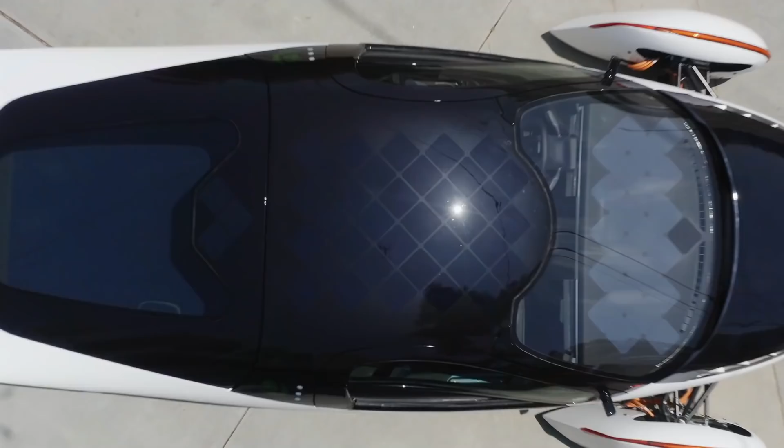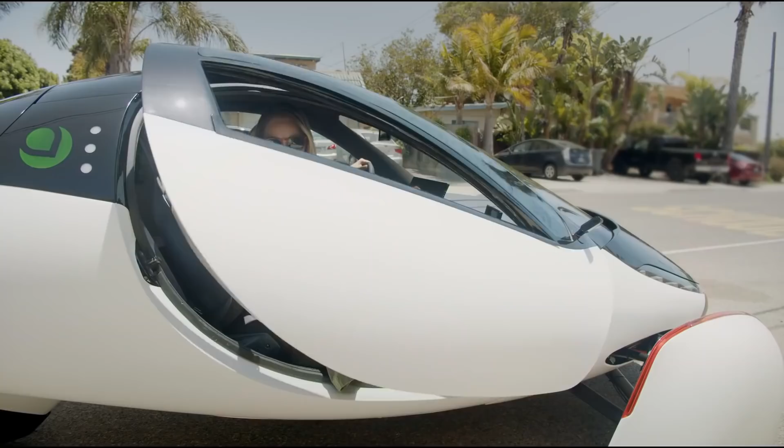Sarah, Steve, Chris, and Jason go over some of the features and improvements made to the vehicle, the latest Aptera Sol. Steve speaks about how working with Elaphe has enhanced motor efficiency and packaging.

Chris and Steve explain how the team at Aptera has been using AI-generated design iterations, which have led to redesigns that increased the amount of interior cabin space as well as battery space.

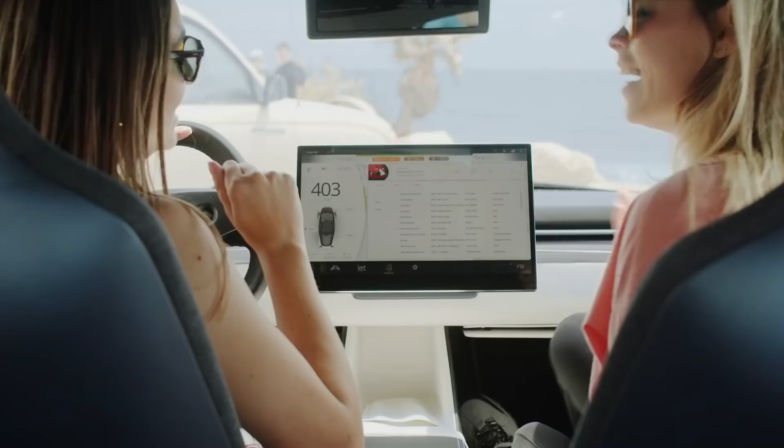Chris explains that they have redesigned how the vehicle structure comes together to ease assembly and ensure better tolerances. We know Aptera is working with Munro & Associates, and Sandy Munro loves a well-put-together vehicle, so these changes should improve the fit and finish, the detailed look of the vehicle.

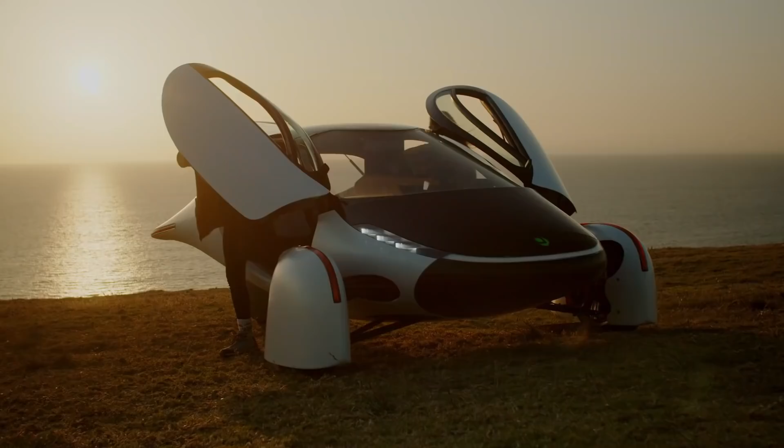A big improvement is that Aptera is working with Roush to improve the suspension system, vehicle stability, and achieve a tighter turning radius. For those who don't know, Roush is a premier company known for producing high-performance components for street cars and race cars, so seeing them partner with Aptera is an exciting development.

In addition to those things, Steve and Chris go over improvements in composites, solar and battery systems, and a lot of other things. I'm not going to keep this going long, so let's get to the video.

Hello everyone, and welcome to our beta update webinar. I'm joined today by Chris Anthony and Steve Fambro, our co-founders of Aptera Motors, as well as Jason Hill, Aptera's designer. And I'm Sarah Hardwick, our Chief Marketing Officer.

Today we'll be discussing some of the updates and enhancements that we've made to Aptera during our beta development phase, which has happened over the past 18 months. We have a lot of new information that we'll be sharing that's never before been seen or discussed, and we'll also be taking quite a few questions from our fans over the course of the next hour. So we hope you enjoy what we have in store for you.

We're going to dive right in today, and talk a little bit about what you'll be seeing. Over the next hour, we have quite a few new features that we're going to talk about in detail.

We're going to talk about how we've added some additional interior and battery packaging room through our AI generative aero improvements, and Chris will be talking about that. We'll also be talking about how, with Elaphe, we have enhanced our motor efficiency and packaging.

We've also come up with a brand new body part breakup, which will be assisting us to ease assembly and assure better tolerances. And a very new and exciting announcement we'll be having on our website later today.

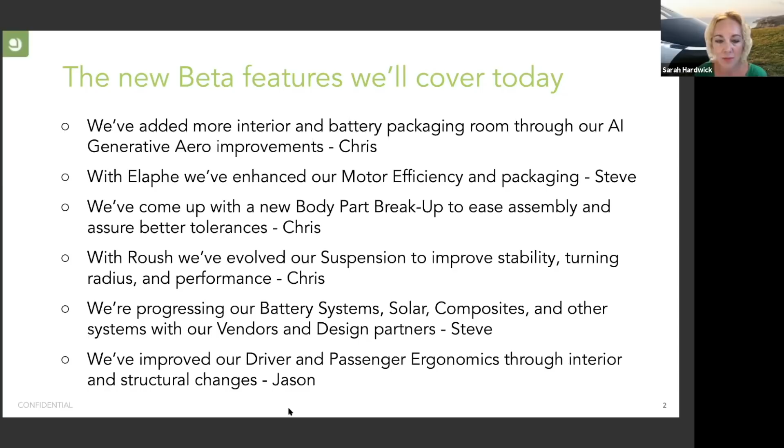Just to give you a little bit of background, we had honestly hundreds and hundreds of questions submitted from our fans and through social media. Probably the biggest one is, where are you guys at in production, and when can we expect to see our Aptera vehicles parked in our driveway? So we thought it would be helpful to reinforce and give you some background on the stages of vehicle development that we have here at Aptera.

So the first stage, which we've just completed, is our alpha phase. Our alpha vehicles are really our learning tools. You've seen Noir, and recently, hopefully everyone's headed over to YouTube and checked out our new video on Sol. The newest addition to our alpha series of vehicles is Luna, and Luna just arrived here in San Diego last week.

So we'll be talking about the progression we've made over the past 18 months from our alpha phase into beta. What you'll see in beta is much more production intent. This is actually going to be what we're representing as our product. When you look at alpha and beta visually, you might not see huge dramatic differences, but actually they are very significant, and that's what we'll be talking about today, some of those improvements and where we're at as we've moved through completion of a lot of the beta phase.

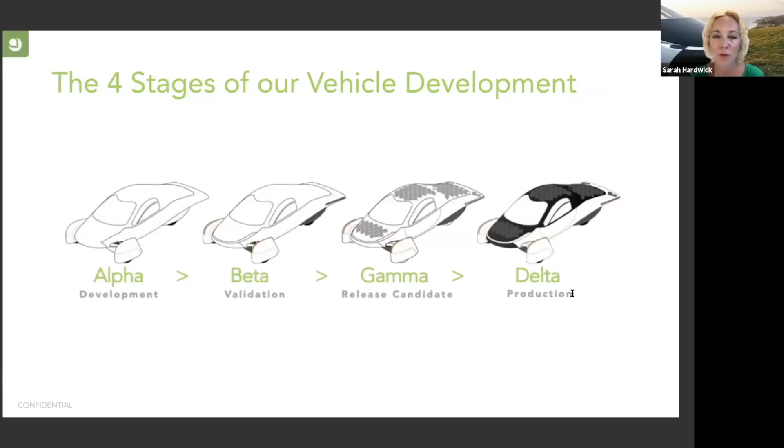From a timing standpoint, we are still aiming and hoping to have moved through gamma and be into Delta by the end of the year. And of course, there's a lot of positive things that could speed that up, or there's also some challenges. So we will keep you posted. We are dedicated to being very transparent with you and letting you know exactly where we're at in this process. But as of right now, we're optimistic and pushing forward very aggressively to achieve those goals that we've set forth.

So with that, I'm going to turn it over to Chris Anthony to talk a little bit more about aerodynamics and what we're seeing with some of our aerodynamic changes that we'll have during our vehicle phases here.

Hey everyone, excited to be here to talk to you about our beta developments over the last 18 months. It's been a whirlwind of activity, hiring up here in our shop in San Diego, finishing up some of our alpha builds. Hopefully all of you have seen the video of Sol, which we released yesterday, which is just so beautiful, driving along the coast and being able to finally see some of the camping features and a little more in the interior. It was a blast to just hang out with everyone and get some great video segments on Sol.

Luna is coming. You actually see it in the background here. The gray vehicle, we haven't wrapped it yet, so it doesn't have any color on it. We're working on electrical and interior fitment and that kind of stuff now. So hopefully in the coming weeks, that vehicle will come together, and that will cap our alpha development.

And then we'll be firmly in beta land, which is releasing tools and parts for beta to build beta throughout the summer. The intention is to get as many production parts into beta as possible, and then learn from that development, and then launch into the gamma and delta versions, hopefully by the end of this year. Super aggressive timelines. All of our engineering partners are feeling the intensity of our efforts.

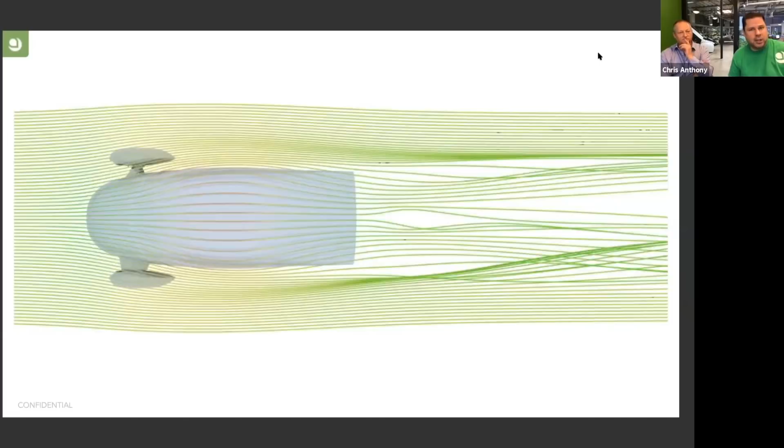Jason informed us that we'd like some more interior room, better ergonomics for the driver and passenger, which required us to change the shape a little bit. We pushed some headroom out, which has implications on our aero, so we actually grew our frontal area by 1%. But we decreased the overall drag product of the Aptera, which is an amazing feat — to actually be bigger, but reduce the overall energy it takes to push the air around the vehicle.

It's amazing that we're able to really zero in on these tools we didn't have a decade ago, but are available today. In a matter of hours we can run a simulation and optimize a certain point. You can see on the slide exactly how the air flows around our very beautiful body structure, in combination with Jason and the team. We've worked to keep it beautiful, but optimize in every direction we can.

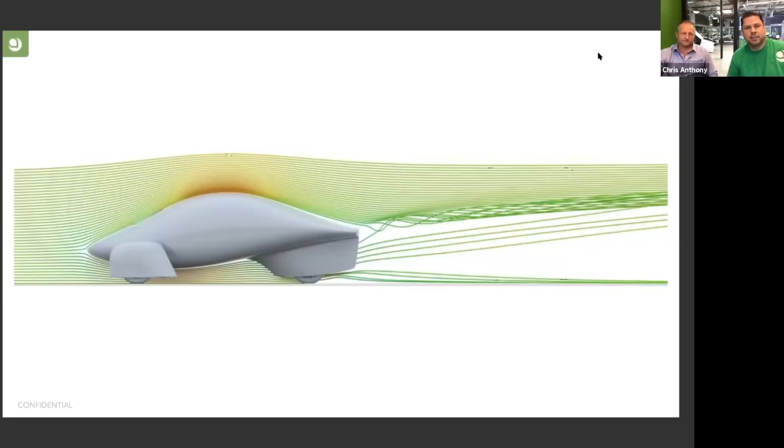The next slide is another view of the flow lines around the vehicle. You can see the foil going through the air — you get high pressure above and below, and we try to keep the air hugging the vehicle as much as possible through every inch that it covers on land.

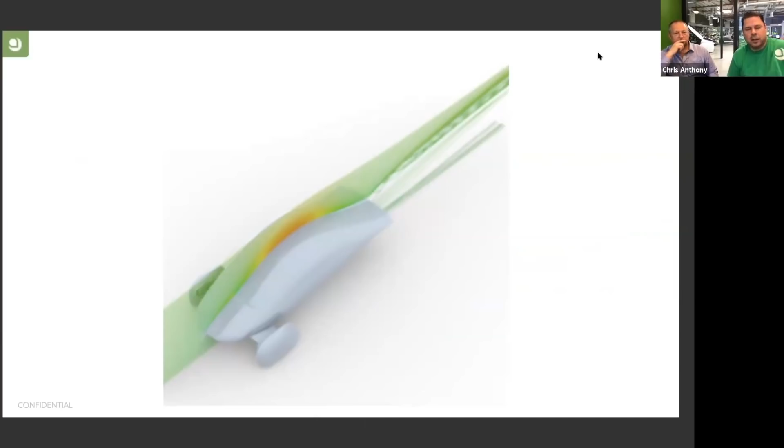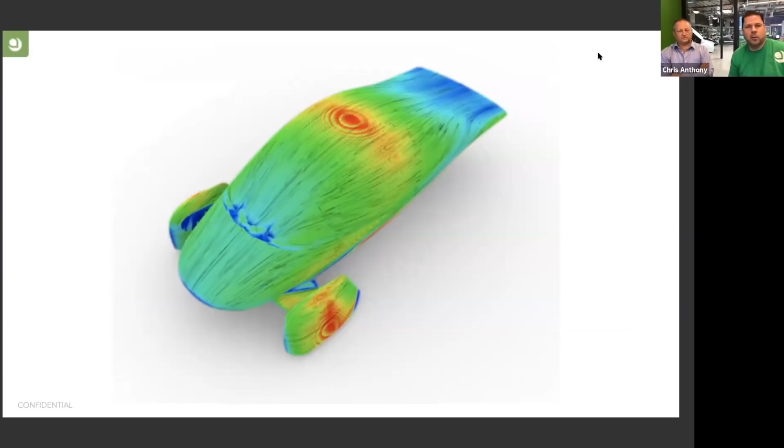The next slide is a pressure map that shows it a little better maybe. You can see the nose and the front of the wheel pants take the brunt of all our aerodynamic hits. If you looked at this kind of analysis of an F-150 pickup truck, the side view mirrors would be big and red — and the total aerodynamic drag of the whole Aptera is less than just the side view mirrors of an F-150.

So it's pretty amazing that this whole vehicle, which seats two passengers side by side, is as wide as a Model S and as long as a Prius, yet it's like driving down the freeway in any car and just sticking two of your hands out of the window. That pressure you'd feel at highway speeds against your hands — that's what the total drag product of the Aptera feels like. It's amazing how little energy we have to use to push the air out of the way.

And it's for a big shape too. You can camp in it, you can put stuff in it, you can sleep in it. So you're bringing this big shape along with you — you're not in some tiny little car, you're in a pretty big vehicle.

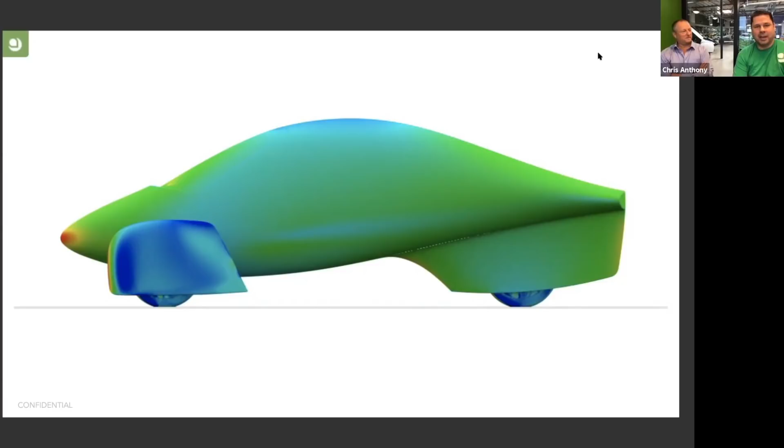The improvements we've made on the ergonomics and everything will suit almost everyone except maybe Shaquille O'Neal — we may have to make a special seat for him. But there's lots of interior room, and to get that kind of packaging and still keep the drag product we have is amazing.

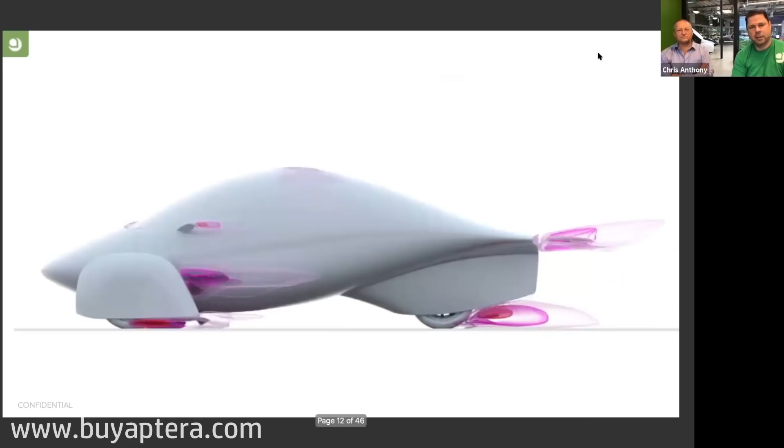On the next slides we get into some noise analysis. An interesting thing in our analysis is looking at noise — it's often indicative of where things get dirty. You'll notice we've added side view mirrors in this analysis, since we have regulatory requirements that require us to have mirrors. We'd love to not have mirrors because, as you see, that adds to our total drag product, but we're talking about some asymmetries and ways to streamline that. That analysis is ongoing.

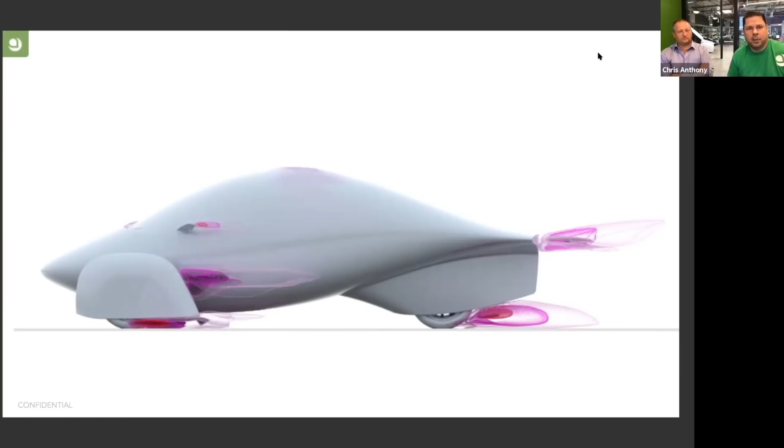The areas of improvement still to be had, I think, are really in the wheel pants and the suspension. Steve will talk more about some of the refinements we've made with the alpha in the coming slides, but really the front wheel covers and the suspension in between those wheels are areas of interest for the next month or so as we start to wrap up our beta design and release all that tooling.

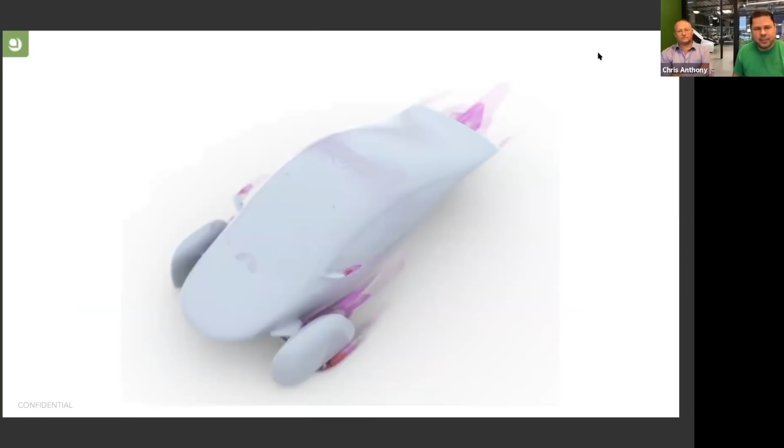You see that area between the front wheel cover and the body. Air gets smushed between the front wheel pant and the body, and that's one of the biggest areas of drag for our vehicle. If we got rid of those front wheels and had some propulsion system that just allowed us to float, we'd have amazing aerodynamics. But unfortunately, you have to have rubber on the road. So that'll be our next focus.

Everything's coming along great with beta development, so we wanted to talk with you a bit about this. This is a good picture showing you how that air is funneled between the body - it looks just like a big funnel between the body and that wheel pant. So things get ugly behind the suspension and the back of the wheel pant. We're working hard to improve that.

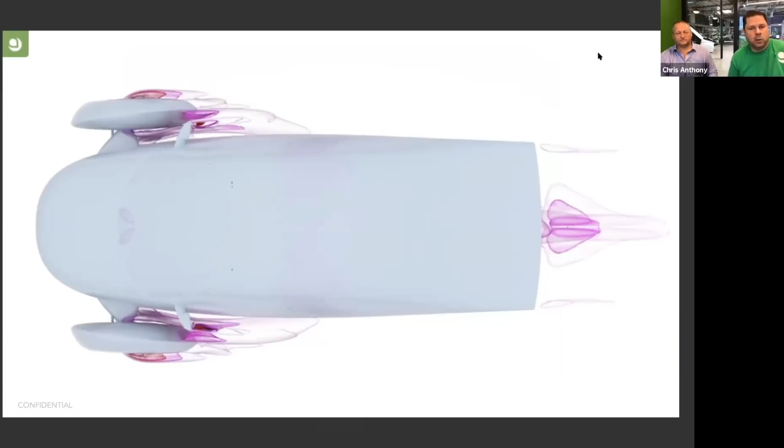Even though things look ugly, we're still at a drag coefficient of 0.13. So for us, it's ugly - we want to improve upon that because we see opportunities, but comparatively speaking, we are beautiful. We definitely want to see improvements there.

This GIF is an interesting analysis. I don't know if it's actually playing though. I don't see it moving here. I don't think it's moving. Sorry, Chris, doesn't look like it is here, but...

This boundary layer, the layer that you have in red there, is actually a way for us in fluid dynamics to let the computer do the work of optimization. When we put this model in the computer, we can let the AI generative design take a look at a boundary layer, and it'll say, this is what you should do to make this more aerodynamic.

A lot of things that we've done over the last years have been very counterintuitive. I'm a fluid dynamics guy from hydrodynamics, and Steve's a pilot for the aerodynamic side, and things that we kind of intuitively say we should do, we do, and then we put it in the computer, and the computer says no, that was bad. And then we start over.

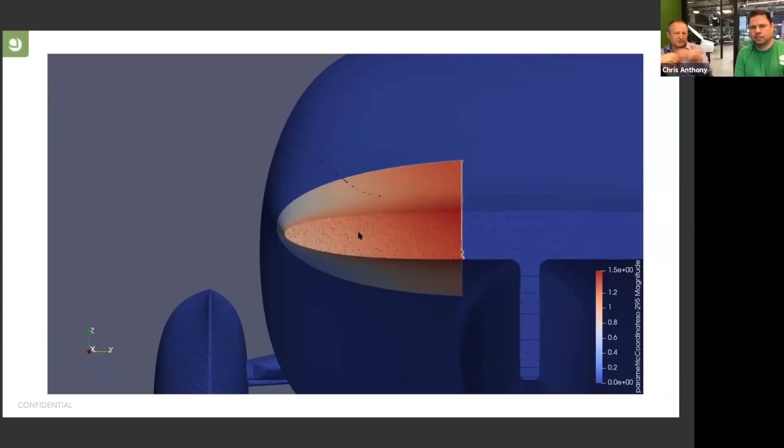What it was doing was telling us to smush the tail - smush the tail down more at the top than at the bottom. So we did that, and we iterated that design, and we greatly improved the tail turbulence of the Aptera while still keeping all the mechanical properties of the full body that we needed.

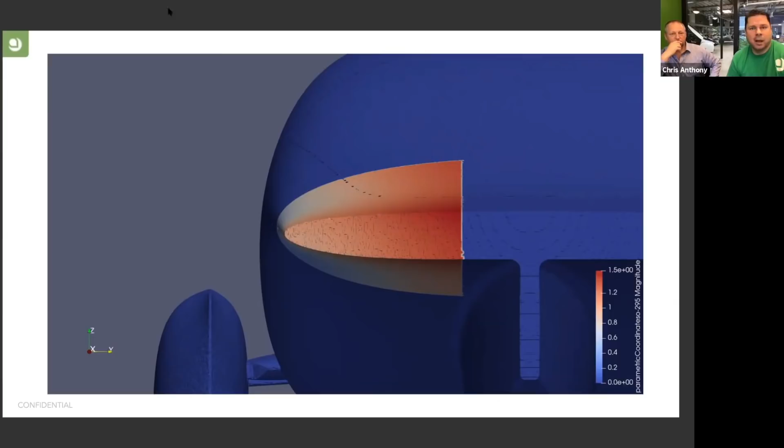The next slide was another example of the rear wheel skirt, something that was not intuitive to us at first, but the generative aero design showed us that the peak that comes down of that rear wheel pant - we thought intuitively it should cut the air like an airfoil, like an airplane wing. But that is not what the computer was telling us.

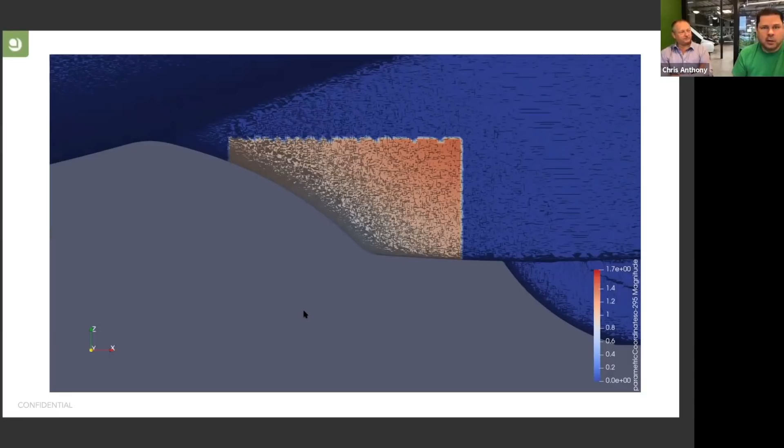The computer was telling us, no, let the air - it's a lower pressure region - let the air flow around that rear foil more easily. So it actually took that corner and pushed it all the way in to line up with the rear tire, which was counterintuitive, but it made a gain for us in overall drag improvement. It was great to see the computer do that work, and then we retested it, and it worked out well.

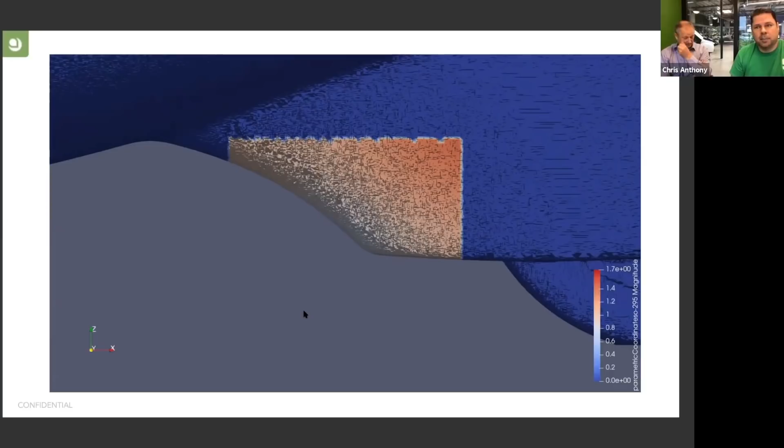The last slide is some of the front wheel cover work that we did, and the computer was telling us basically to not compress that air between the body and the front wheel covers as much as possible, and to move those points on the wheel cover adjacent from each other to decrease the pressure between the body and the wheel cover and release that pressure behind the wheel pant. I think that's just great feedback for the computer to tell us the direction we need to go, and then we follow that direction, and Jason can mush and meld it and make it look beautiful, and then we end up with a beautiful looking foil that does everything we want it to do.

In this picture, I think you see the starting case, but the ending case would be a little bit asymmetrical when it's done, which is counterintuitive.

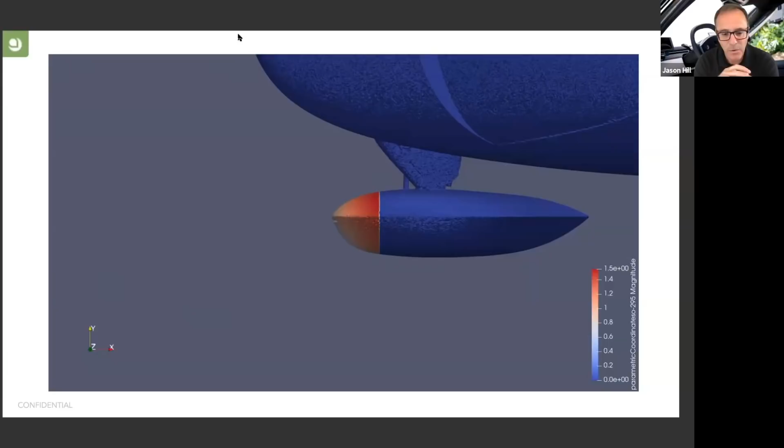But to Chris and Steve's point in regards to the aerodynamics and the tools, it's fascinating from the design standpoint to use that AI generative suggestions and see how close it matches either the intuition or the instinct, from either an aerodynamic or a shape standpoint. So it's really been a great validation tool and allowed us very quickly to iterate, like Chris said, in a matter of hours. We can present a new model, run it, and find out what worked and what didn't. So we're very close on wrapping up this beta body, and it's an amazing feat from a design standpoint to increase the size and ergonomic functions while decreasing the overall drag. We're really pleased with the optimization tools we'll be able to bring to this.

We have to throw a shout out to Jeff Bezos. Thank you for Amazon Web Services. Instead of having to build a computer cluster here that would have cost us tens of thousands of dollars to run these simulations, now we can just upload it to the cloud servers, and within a matter of hours we have the results that we need. So it's a great flexible use of compute power that we just didn't have before. It's great to see that iterate quickly and get the results back quickly.

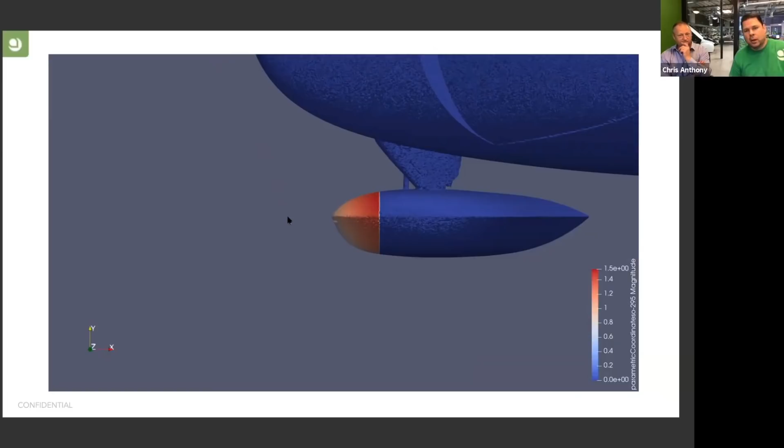So the first question is, why did you decide to put the rear view cameras on dedicated stalks? Could they not have been embedded in the front wheel covers instead to improve aerodynamics? We've had that conversation and battles internally many times. It seems like, gosh, the front wheel covers would be a great place to have them. They're mostly pointing backwards, but as you turn the vehicle, the wheel covers move, so that makes it more difficult.

We did have originally a design for cameras in the body, so everything was flush and conformal with the body. But the problem is you need some digital stitching of the image and some image correction that is a pretty hefty lift on the development and firmware side. We did not think that within our timeline we would be able to execute on something like that. So putting the cameras out on stalks, getting them away from the body in a reasonable fashion, just seemed to be the best of all options for us right now.

Hopefully in the future we can improve aerodynamics and maybe have the cameras embedded. We'll be able to show, I think, the government officials how many tons of CO2 we'd save by pulling the mirrors, deleting the mirrors and just simply having the camera. So we'll be able to show that calculation. Maybe that might help them understand.

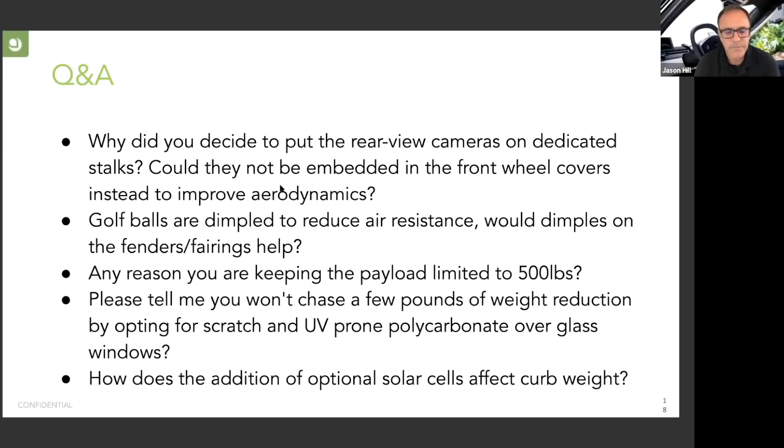Thank you. Any reason you're keeping the payload limited to 500 pounds? We're very weight sensitive, so after Thanksgiving when you come back home with more weight in your belly, you're going to take an efficiency hit in the Aptera. It works out to about for every 30 pounds, you gain or lose 1% of range. So we're more sensitive to weight because we're going to be the lightest weight, most aerodynamic, most efficient vehicle out there. So limiting the payload capacity assures you get the kind of range you're expecting, and handling as well.

The ratio of the sprung mass changing with an additional 500 pounds is a much more complicated thing to handle with the shocks and springs set up. So there has to be some limits, and that's a comfortable limit for us. If you have a big electric vehicle that weighs 5,000-ish pounds and you add 500 pounds, it's only a 10% weight differential. If you have an 1,800 pound vehicle like the Aptera and you add 500 pounds, it's a lot wider spread in how the vehicle dynamics work, the dampening, the spring rates, that sort of stuff.

So one more question related to weight reduction. Actually, I think the next two questions are related to weight reduction. Please tell me you won't chase a few pounds of weight reduction by opting for scratch and UV prone polycarbonate over glass windows. Did you write this question? It's an ongoing discussion we've had. First of all, no, the active plan is automotive glass in every window. That's the plan of record.

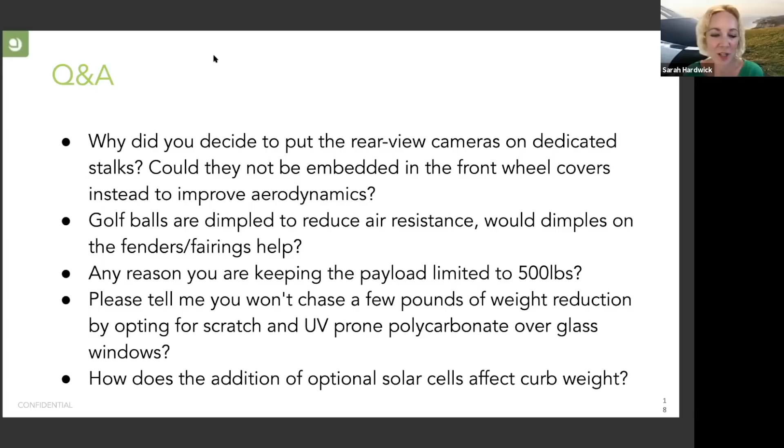And the last question for this section: how does the addition of optional solar cells affect curb weight? It's interesting, you would think the solar would add a lot of weight to the vehicle, but the full solar package with solar cells all over the vehicle, those solar cells only weigh about 4 pounds. They're very, very lightweight. So the weight impact of adding the extra solar on the rear hatch or getting the hood solar is very minimal. We have to have that composite structure there for a hood or a hatch anyway, so you're not incrementally adding a lot of weight.

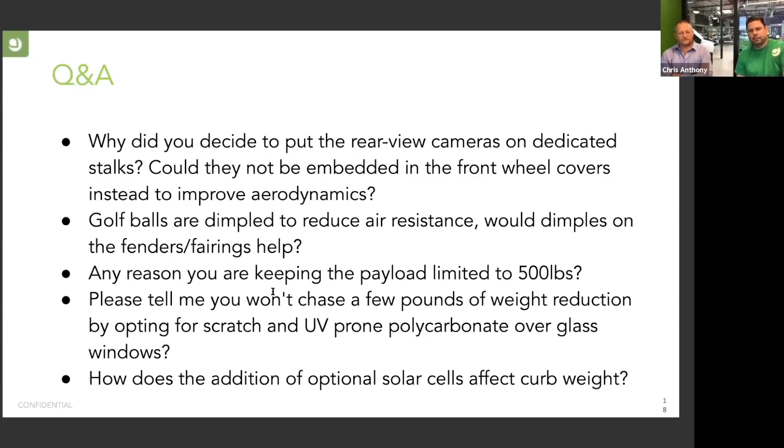That makes sense. Okay, I think we're ready to move into the next section, which is the Elaphe Drivetrain. Steve's going to give us an overview of some of the key changes that have been happening in this area, and then we'll go through some images and address some questions. So go ahead, Steve, and give us an overview of what's happening in beta with our drivetrain.

From a big picture perspective, when we first started this endeavor and talked with Elaphe, we basically got things that were off the shelf - motors that were in current production, inverters that were in current production. As part of our feasibility study, we said let's just integrate them with our design and see how it goes. And of course, it's been an overwhelming success. We've been able to free up the body and structure by having full autonomy of movement inside because we move the powertrain basically to the wheels. There's no drive shaft, no CV joint, no gears, anything like that. Everything's in the wheels. So that's been a profound success.

But early on, we realized that the size of our vehicle, the reduced power needs, and the different speed regimes everything operates in, we wanted to fine tune the efficiency with Elaphe. And so that involves some elements of the motor design itself, in terms of the magnets and segmentation, the speeds that it was most efficient at versus the off-the-shelf unit.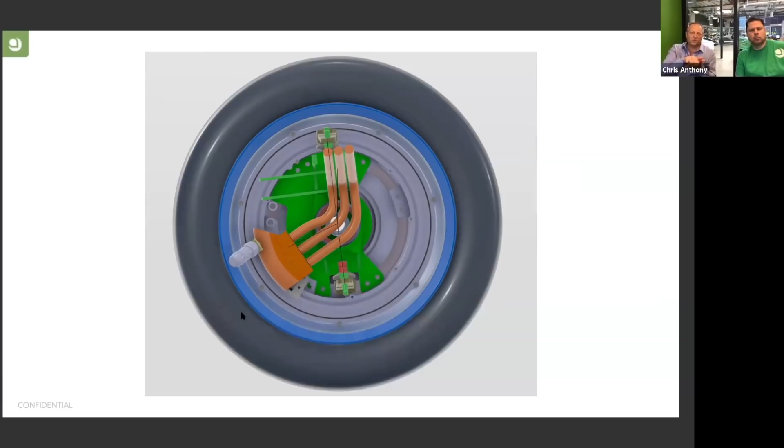So that's one of the things Carl and Elaphe have been working on. Now the cables will exit the motor at the bottom and be able to be packaged in the control arm aero cover, unlike what you see on the alphas now.

Next slide. So, being able to connect - I don't know if you can see the geometry markers on the line, but the control arm goes much further into the motor because it connects directly to the motor with the suspension attachments. Whereas in the alphas, it's actually outboard an inch or so because of the upright. So it's improved geometry there.

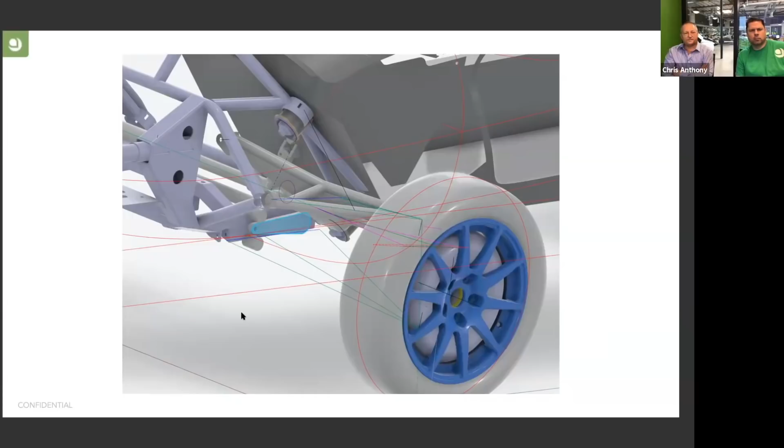And then can you speak to the rear wheel changes? Yeah, the rear wheel is the same thing, just optimizing the wheel to attach to our swing arm. Lightweighting the rear is even more important than lightweighting the front of the vehicle, so we're spending extra time in our rear suspension development to keep things nicely packaged and as lightweight as possible.

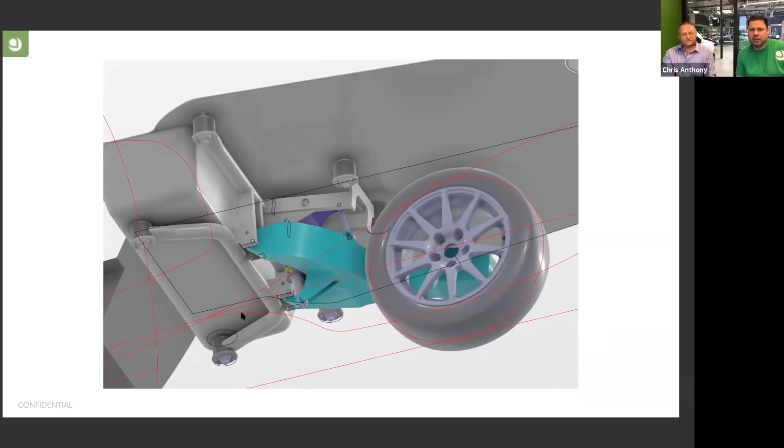The next slide shows a bit of the aerodynamic challenges. You can see the improved geometry here. In fact, is that an accurate image? I can't tell. Yeah. So we have the arm covers modeled in there, and you can see the range of movement - that's why the ball joint is sticking out.

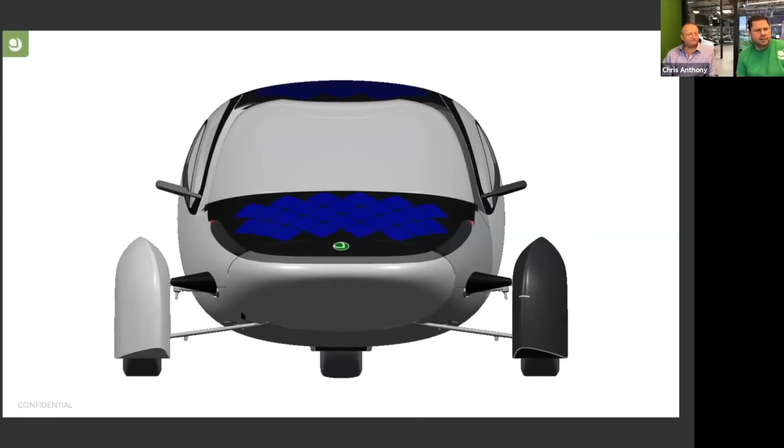The next slide shows the upper arm cover a little better. This is all something we couldn't do with the alpha because the geometry just wouldn't allow it. By changing the geometry and working with Elaphe to account for our special needs - the Aptera's geometry, suspension, and width - we're now able to package the A-arms with a nice little flexible cover, reduce the drag, and get rid of some of that noise you saw in earlier software models.

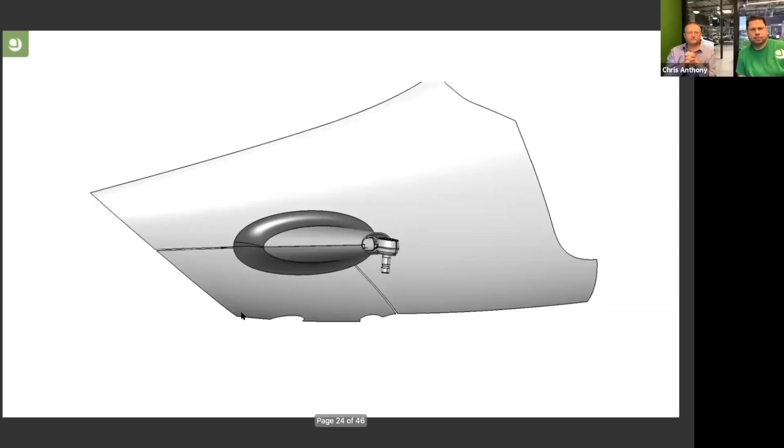And anything else before we head into questions for this section? Nope. All righty.

First question: how will the car run if one of the motors fails? It should run just fine. We've actually done that test already - we changed the three-wheel drive vehicle to operate on one motor, different wheels, just to do some basic validation.

Would it be treated as a limp home mode or some limited performance or something like that? That's all to be determined, but yeah, you'd still be able to drive the vehicle with only one-wheel drive.

How about tire pressure monitors or self-sealing tires? We'll definitely have a TPMS system that will tell you what your tires are running at any given moment. It's extra crucial for us because we're so lightweight and so efficient that you need the tires at their proper pressure. I haven't seen any self-sealing tire technology that doesn't come with a weight penalty, sometimes a significant one, so we aren't really looking at any self-sealing tire technologies because it adds too much weight to the equation.

Makes sense. Will production model have autonomous driving or at least semi-autonomous driving? We're working on that now.

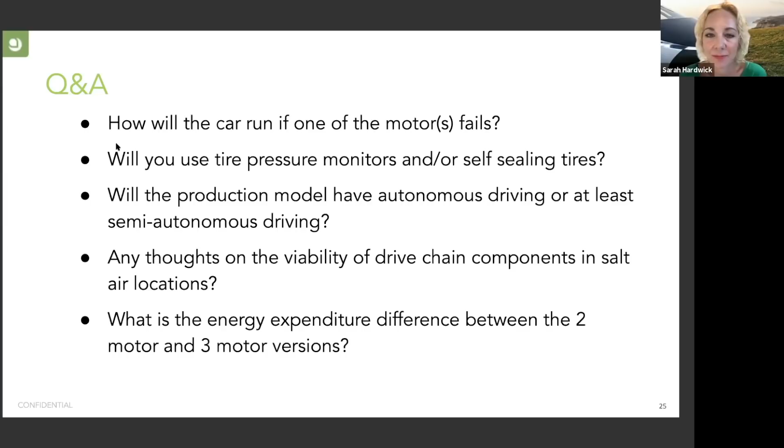What is the energy expenditure difference between the 2-motor and 3-motor versions? I don't know the exact number, but it is a difference—about 10%. If you wanted to flatline it, there's some nuance, but the 3-wheel drive uses about 10% more energy than the 2-wheel drive version.

All-wheel drive gets you more power and great torque vectoring between the front and rear. So if you live in snowy, icy climates, you may really want all-wheel drive, but the most efficient drive package is front-wheel drive—about 10% difference, and that's without any optimization at the moment. For example, one could imagine selectively turning off the rear motor and reducing back EMF or whatever so there are no parasitic losses.

We haven't even begun that development yet, so the 10% number is just as it is right now, if you use all wheels equally for power.

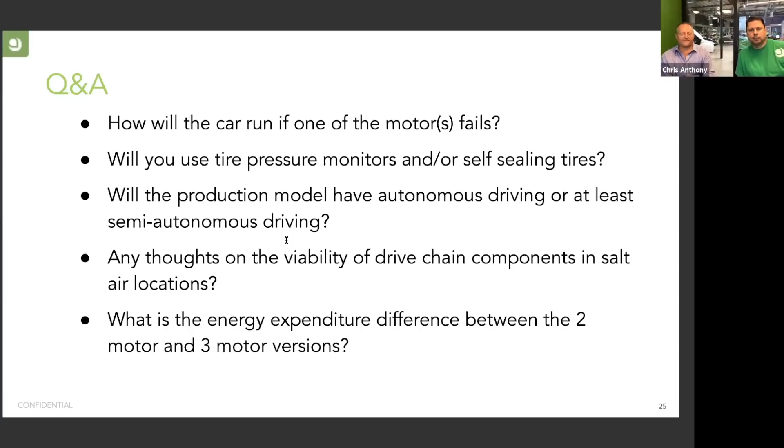Thank you. Well, I think that wraps up the drivetrain section questions, and we'll be moving on to body breakup, which we'll go back to Chris for a summary of what's happening with the body and some of the major changes we've been implementing and are now nearing completion in our beta phase.

Nathan, Greg, and our structural team have made some great advances on our body structure and breakup—even stronger, even easier to build, but it is a bit different than how the alphas came together.

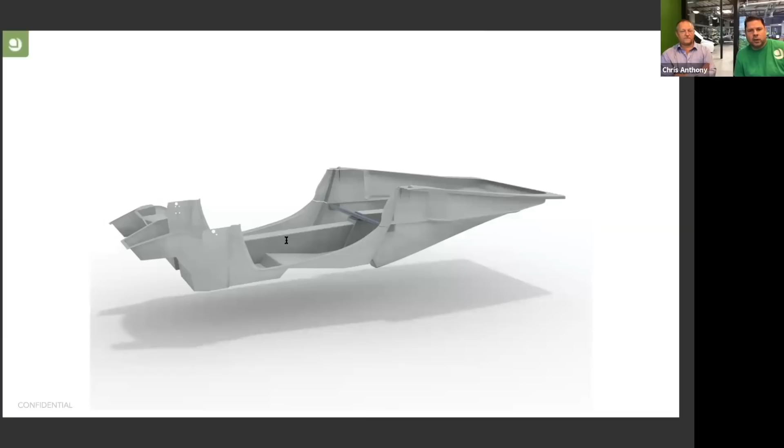Let's quickly go through the three slides Sarah has here. You can see the tub, and then the tub gets a rear closeout to close out the rear storage area, giving you lots of nice storage. The rear storage area is actually dropped a few inches too, so we have more internal storage. Underneath that black panel, you have storage between that and the floor, enough to fit a week's worth of camping gear.

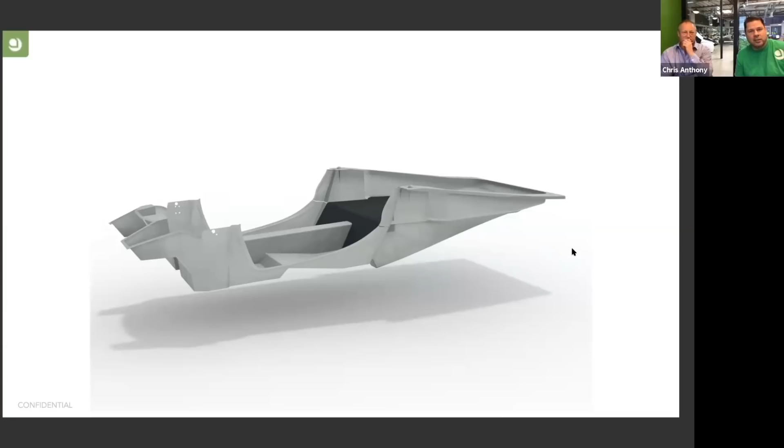The next slide shows how the top comes on. Everything kind of keys together like Legos, and everything's human positionable, which is nice. So two people can lift up any body panel, take it to the assembly floor, the jig, where it's bonded together. And there you go - you have the world's strongest composite vehicle structure for a three-wheeled solar powered EV.

We hope to increase the roof crush strength greatly from where we were before, including side impact and other metrics. It's been a delight to see how the structural engineering has come together. To be clear, where we were before exceeded the FMVSS for passenger vehicles, and exceeded at the time the roof crush strength of any passenger car sold in the United States. It's only the best vehicle structure ever created. I agree.

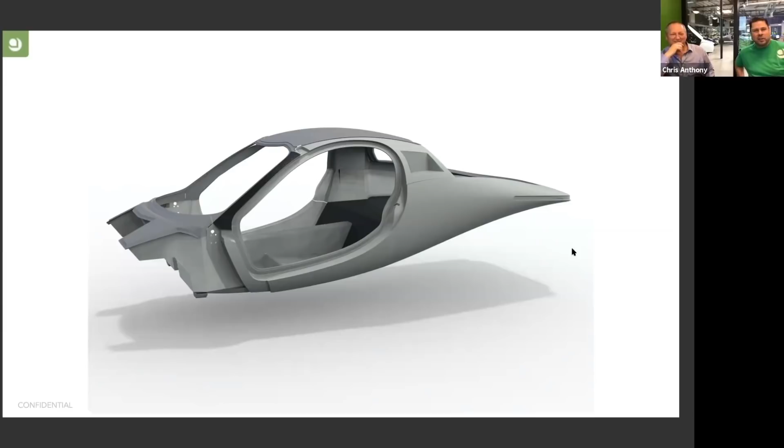Some questions on this topic, Sarah? Absolutely, always lots of questions.

This is from one of our ambassadors - he's been planning out his garage space for over a year now, and he's wondering, is it still accurate to plan for a footprint of 88 inches wide? He wants to make sure he can get in and out of not only his garage, but tight parking spaces. So is that still the plan?

I would plan for a 92-inch entryway, just to give you a couple inches of sway. We'll have sensors on the wheel pants to tell you how close you are, but 92 inches to get in and out seems like the minimum we look for, like in trailers and where we're going to park. 92 inches is nice, but the vehicle width has not changed. We may be able to bring that in a little bit, but probably not more than an inch. So I would plan for 88 inches - 92 inches to get in, but the vehicle footprint is 88 inches wide.

As it relates to our international customers, of which we have many, we are aware there are some regions where Aptera is currently too wide according to local regulations. We are committed to bringing Aptera there - we will absolutely be working with partners and looking at potential design modifications to make Aptera available in your country. That will happen after we have our main vehicles into production and get that process rolling, but it is certainly our intent to make Aptera available everywhere in the world.

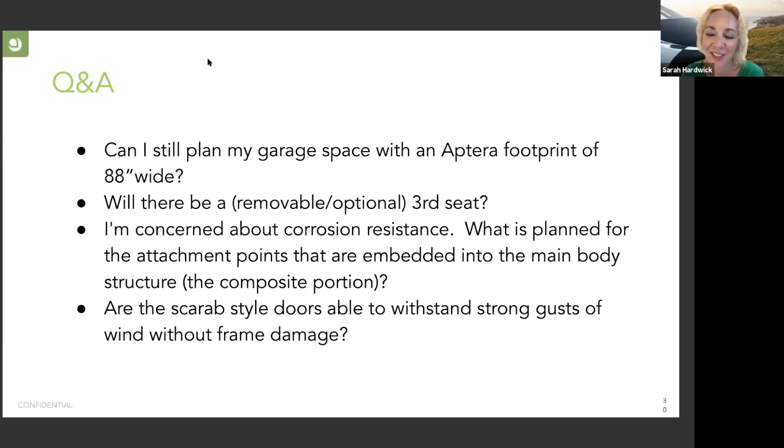Speaking of things, elements to withstand, how about strong gusts of wind? Will the Scarab style doors be able to withstand strong gusts of wind without frame damage?

Better be. We'll talk about our new engineering relationship in the next slide, but we've actually been working with Roush Engineering on the door systems, and it's a question that's come up as we've worked on the upper and lower door hinge and strut strategy, how to, in traditional automotive terms, have good wind resistance with our doors.

It's actually easier for us with our Scarab style doors than a typical passenger door, because a typical passenger door opens flat, so you've got a lot of area for the wind to hit and push against the hinge. If you have a door with some tilt, it moves the air around it, so even if you take a lot of gusts, it's not nearly the pressure pushing against that door as you'd have in a typical automotive.

And the attachment points are wider too, so that makes the loads much less into the vehicle.

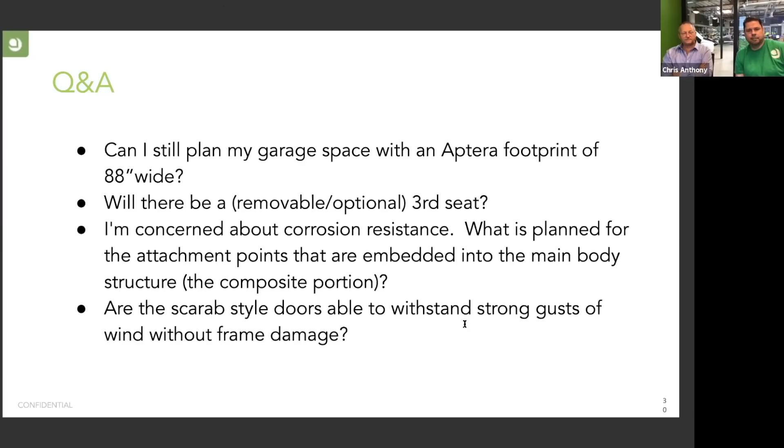Correct. Okay, great. Moving on, Chris mentioned Roush, and as I said earlier, stay tuned or head over to our website later today, where you'll see a press release announcing a relationship that we have with Roush. We're very proud and excited to bring them on board as one of our key collaborators in this process. Chris, maybe you can give us some background on what's been done and some of the key changes. I know this is a major area of focus for us that we've really made a lot of enhancement to in our beta phase.

I'll try to make it quick too, because I see we're taking a lot of time. An hour runs quickly. But Roush has a storied history in performance engineering and racing. They've done a lot of great things over the years with Ford and other big automotive brands. They've come in and really helped us with a world of part supply knowledge and how to get our vehicle suspension ready for production.

We have some animations of some of the work they've done with their Adams models to tell us how our suspension will perform in on-road conditions. The first one is our turning radius. Improving our turning radius has a lot to do with how your suspension is positioned, and our in-wheel motors have some unique challenges. So getting that right has taken some effort, but we've improved the turning radius and then moved on to other suspension efforts.

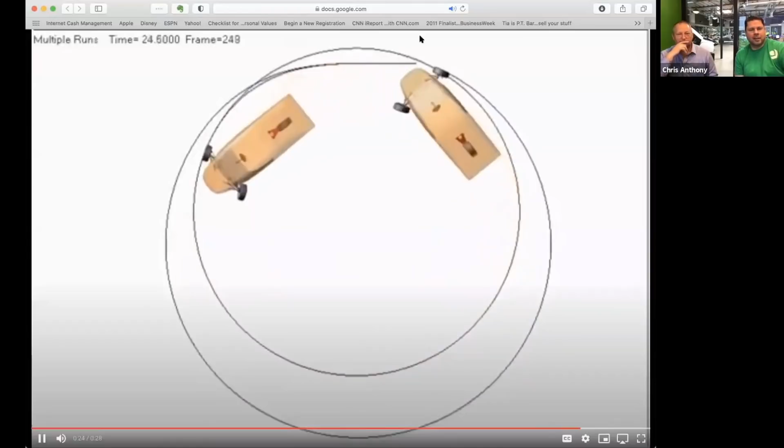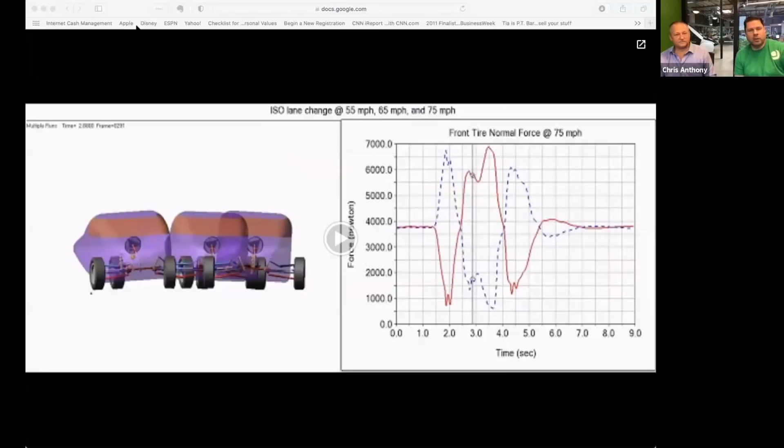The next slide talks about some aggressive lane change scenarios, analyzed at 75 miles an hour. If you saw our track video from Verona Raceway, we did some basic lane change scenarios at 45 miles an hour and were seeing some wheel lift. Working with Roush, we've really cleaned things up.

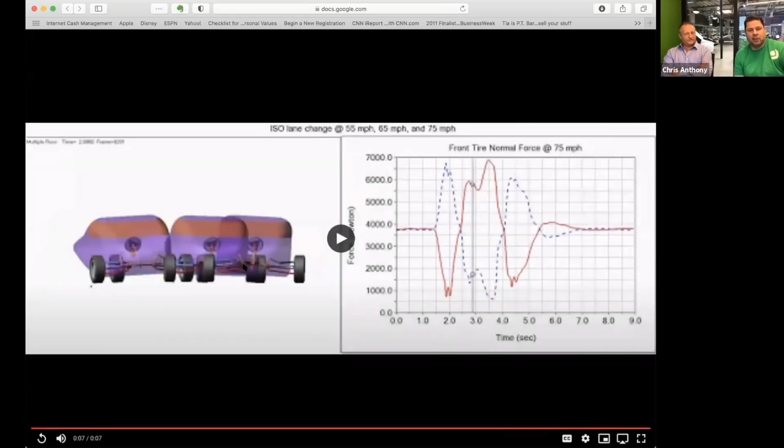We've added a sway bar, which gives us added stability. We had hoped we wouldn't have to add it because it's extra weight, but it makes a world of difference in how the vehicle handles. So at 75 miles an hour, aggressively getting out of the lane and back in, I think it looks beautiful, and absolutely no wheel lift.

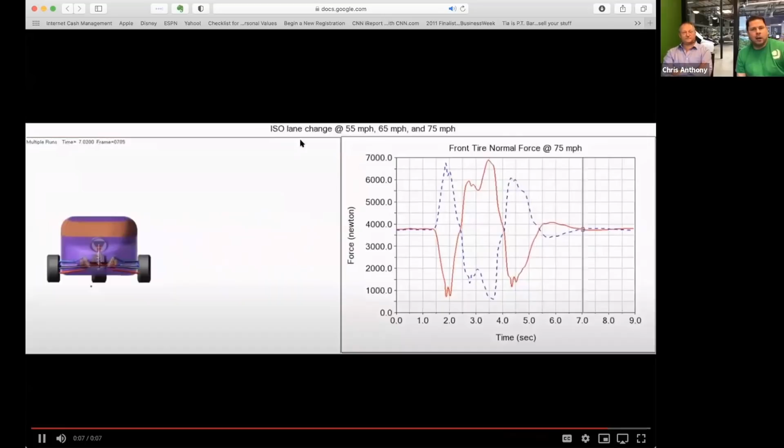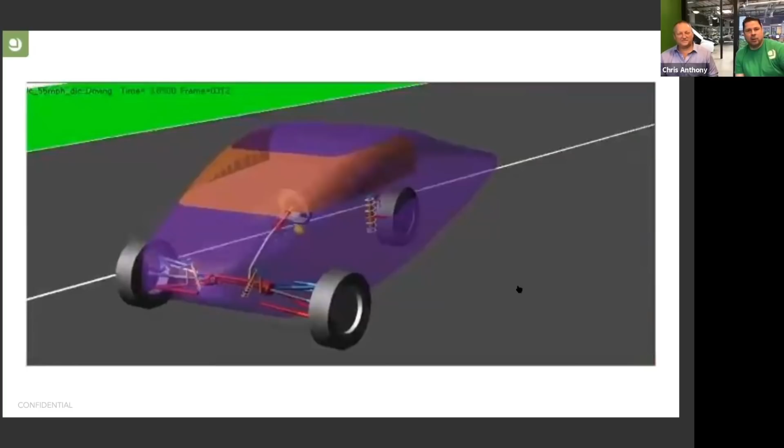The next scenario was similar to the last one, but shows the kinematics of how it works: staying centerline in your lane, then having to move out because there's a deer, a moose, or a ladder that got dropped on a California freeway, and you have to get out of the way and back into the lane. It was kind of the same simulation.

But questions on this? Sure. Do you want to talk more about performance on the track? I know we've taken both Noir and Sol, our alpha vehicles, out to the track to validate a lot of the design work done in beta. Can you give us any updates on that?

I think in general Matt, Dan, and the team have done great work getting the vehicles out on the track and proving them out. The consensus is the vehicle feels very well grounded. The extra unsprung weight on the wheels gives a different feel for the CG, but it's performing beyond expectations we had for Alpha. With these improvements from Roush, the betas are going to be even better.

What we've seen with Alpha raised no flags, but we were already well underway with beta development by the time we got that data. So when we go back to the track with beta vehicles, it'll be to Buttonwillow and other more performance-oriented venues.

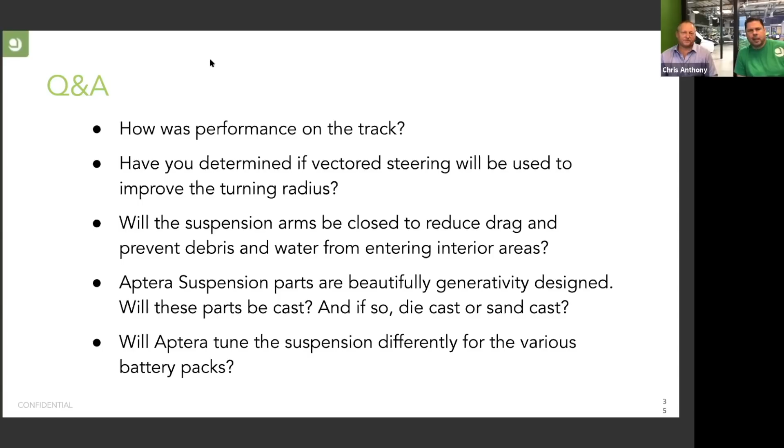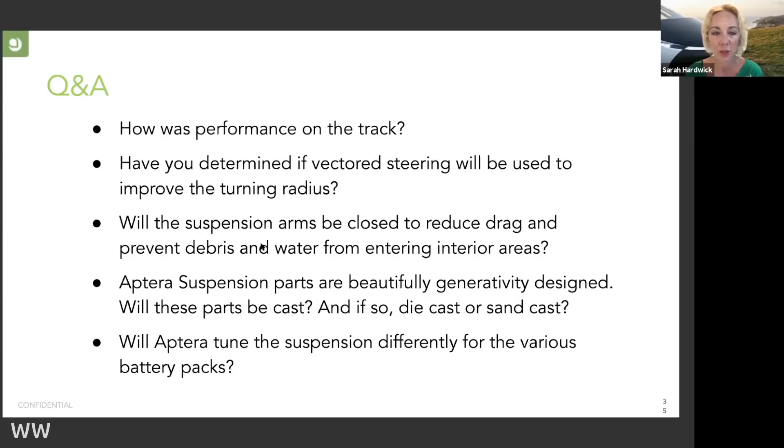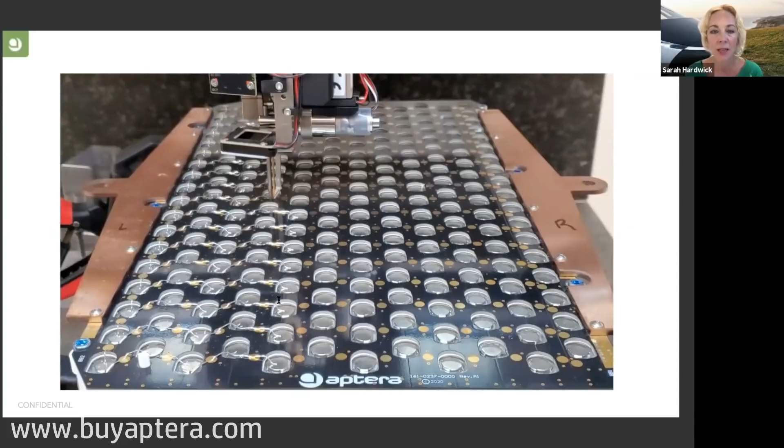We've got one more short section here. Steve's going to talk a little bit about batteries. Steve, anything key or new you want to share? Yeah, I'll be quick out of respect for Jason's time.

One of the big innovations in our battery module is that we don't have this printed circuit board you see here - this is early on, almost pre-alpha. It's a flex circuit, and that's not necessarily the innovation itself. The flex circuit is great because our battery management system is now distributed through the pack on it. The real innovation is how that flex circuit attaches to the cells.

The bonding time is a factor of 5 or so faster than traditional modern EV manufacturers. For Aptera that means we need fewer machines and have faster throughput in our pack production - a real boon to us. It improves quality and throughput but reduces capital costs since we need fewer machines to make the batteries. It was taking about 3 minutes to wire bond our first modules; now it's taking about 40 seconds. Great improvements in throughput.

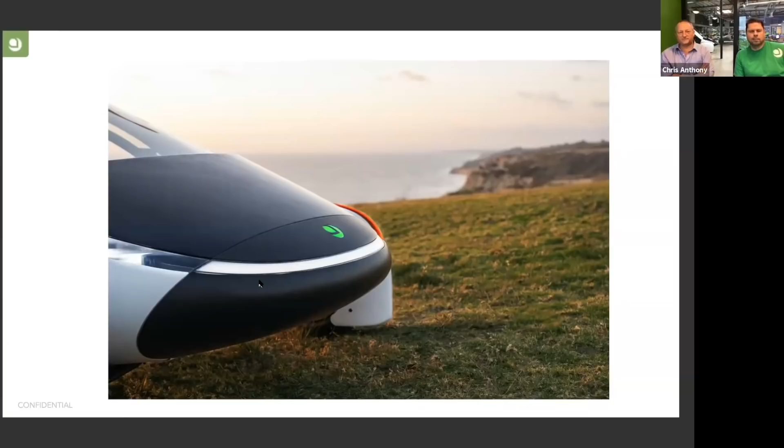Anything else on solar or electrical you want to address, Steve? We're making great progress with the high voltage conversion - we've had a team working on that project for a while. It's going to be our own power electronics that feed from the cells directly into the high voltage pack with the minimum number of step ups and downs. That's a real innovation as well. Lots to talk about - this is exciting stuff.

Any questions you want to address? Any key questions on this battery section here related to battery life post-sundown, or active versus passive? Anything you think would be good, maybe pick one or two questions and we'll go through.

I'd say the battery pack cooling is sort of a hybrid cooling. There is a coolant channel, but it's not actively refrigerated, doesn't need to be. That heat is shared or generated through a variety of systems in the vehicle as needed.

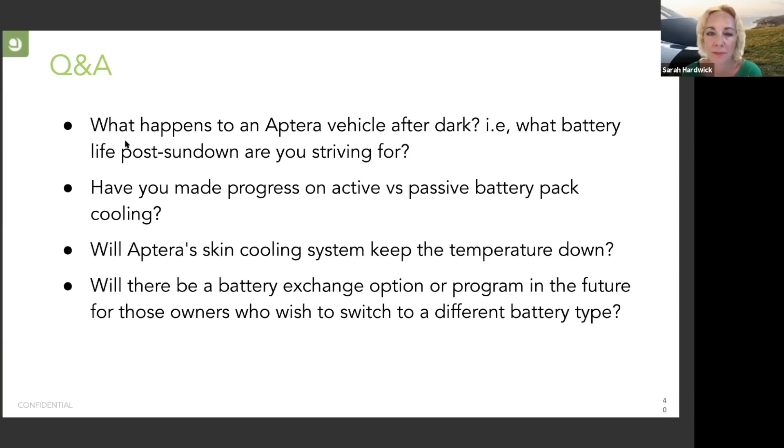And then as far as being modular or upgrading, is that still being determined by our team? Yeah, I mean there's nothing that I can say right now in beta about how that will go in the future. Obviously those are important things. Everybody asks about them. We're mindful of them, but I don't have anything new to report.

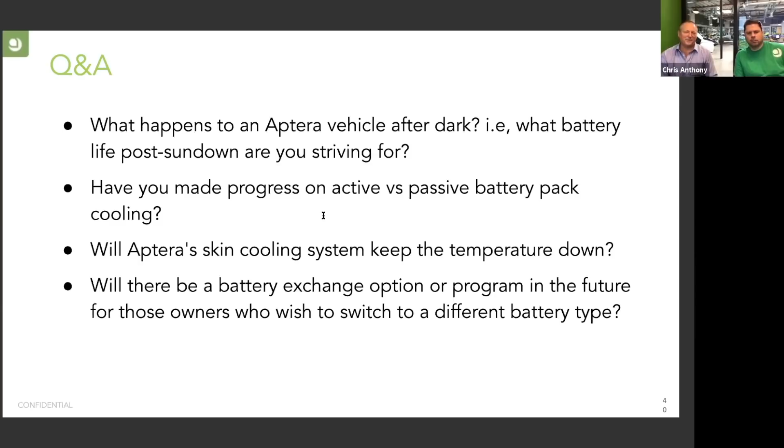Without further ado, I would like to bring on Jason to talk a little bit about ergonomics and interior design of the vehicle, and all the amazing things that come along with the experience of sitting in Aptera, how it feels when you're driving, and the things you have available at your fingertips. So go for it, Jason.

Great, thanks Sarah. I'm really pleased to see the amount of panelists, and I've been watching all the great questions that have been flowing in. I wish we could really address a lot of or all of them, but there's some great stuff.

From a high level, we started over a year ago knowing that we were going to move beyond the alphas. We pursued the alpha program to validate and update the ethos and the design philosophy of Aptera as a company and as a product. Now, as we get close to wrapping up beta, we're really excited that we've been able to improve in so many metrics. We like that we can improve a little bit here and there, and it adds up over the life of the development to an overall much better result for all of us, especially as it relates to the interior design and ergonomics.

We could make a lot of compromises as humans, such as getting in and out of the vehicle, but at a certain point you've got to make it really, really the best experience for the user, for the operator. So knowing we had such a task, the results from beta are kind of summed up in the following way.

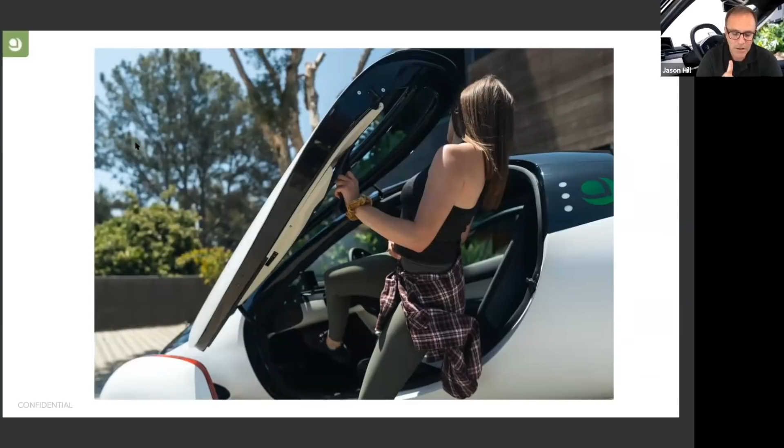We've improved the ingress egress. We've moved the H point, which is basically the automotive term for where your hips rest, to an optimal location. We've increased the headroom in both the up direction and the out direction. So your basic feeling from sitting in the cabin of beta versus alpha is overall better.

We don't have a big vehicle. We have a nice, comfortable cabin. But we've done such a good job, I would say, to improve and learn from the teachings of alpha and express them in beta. You can see Soul here came out very, very beautiful, and it hits all of our metrics as far as what we want to learn from.

We are constantly adjusting what we call our CMF, which is color, materials, and finish, to bring the best materials in there for the best experience, the touch and the feel, how that works. Our seats are being developed to be as strong as possible and lightweight as possible, and matching all the ergonomic needs of human figures. Our UX, our UI/UX has gone through a revision and an update. We look forward to really sharing a clean, intuitive, and fantastic UI/UX for that. I think that kind of hits the main points.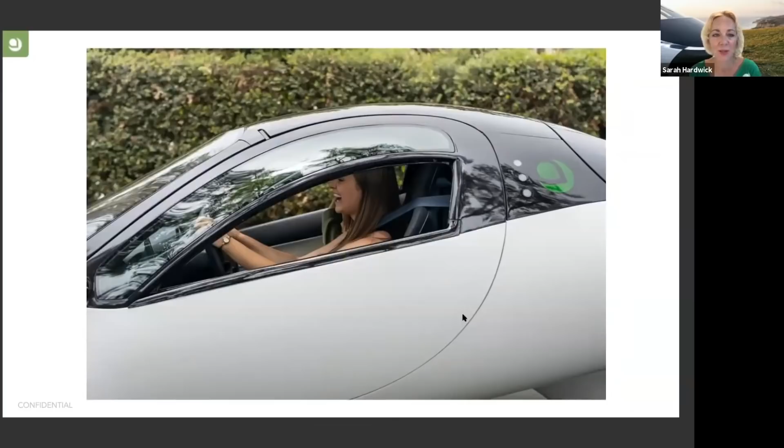If there's some specific questions, Sarah, or we can go back to the list. There sure are. I love that picture, she looks like she's having so much fun in there driving. All right, yes, we definitely have some questions. One thing I think is so cool, Jason, is we've been looking at renders for our vehicles for so many months, and when you look at the photo that's behind you and the one we just looked at, it is exactly like the renders that we have been producing. I think it's really cool to see that ability to look at side by side. It's really impressive, so good job.

Question: will the seats be ergonomically designed to support the curves of the back? Yes, of course. Naturally.

How about headrest? Any of the following questions you'd like to address, feel free, I know everyone always asks them. Alpha seats, which form the basis for our beta seats, already have that headrest proportion in the seat for headrest protection. What it doesn't have in a traditional automotive sense is an adjustable headrest. So we kind of went to the place where it needs to be to protect the most amount of people.

Makes sense. How about airbags? Do we have any information on that? Maybe that's a Chris question. We're working with several different partners on airbag solutions. It comes as kind of a parts bin solution, so hopefully we'll have an agreement soon that has a trickle down to all kinds of things we're engineering for Aptera. But we don't have something firm yet, hopefully soon.

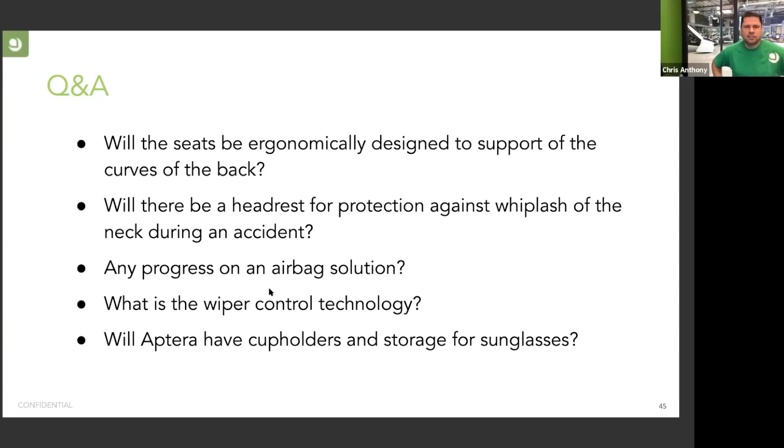Excellent. How about wipers, Jason? We expect to have a normal interface where you turn them on, turn them off. We're also looking at auto sensors as kind of a standard way to do that. That is part and parcel - I saw a question from the attendees about UI/UX, which is user interface and user experience. So all of those things, how you interface with the vehicle and what's your experience when using it, and wiper control technology is part of that.

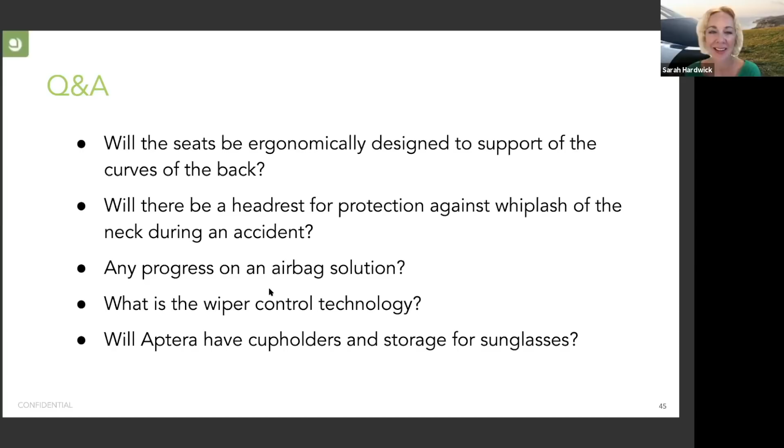And then, of course, the question on top of everyone's mind: what about the cup holders? I don't see them - where does my phone go, what about my glasses? We do have ample storage for glasses, and there are built-in cup holders. We've optimized their position and location, and we're continually looking at how else to do that. If you've got sharp eyes, you might find some images that show those features. But we didn't just add cup holders - we started with an intuitive sense that that's just a must.

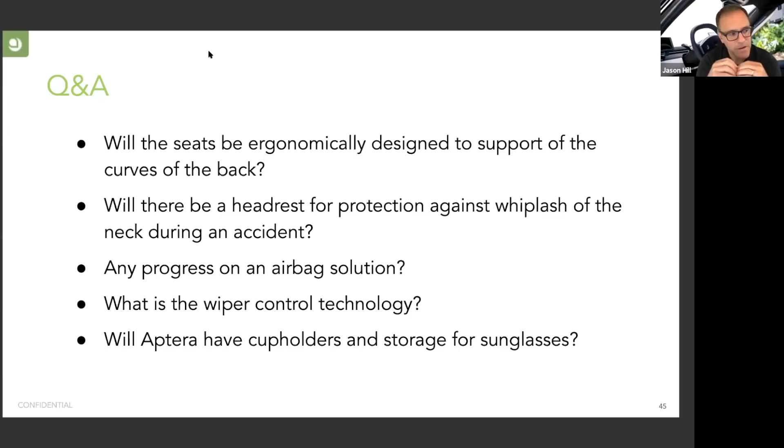Same with phone and charging options, same with small item storage. If you look at the interior of Sol, you'll see a couple of those things. One is this add-on center console extra storage that has a zippered pocket, and another pocket where we'll offer charging or inductive charging - it won't be embedded in the vehicle, it'll be part of the accessory. Same with where your traditional glove box would be - that's a pull-down, brilliantly engineered, lightweight, strong little pouch, not dissimilar to the back of a luxury airline seat, and you'll be able to store things in there.

We did that in the interest of - and it really goes to the whole ethos of the interior design - instead of engineering a hinge, a latch, a seal, a lock and everything, we put everything of convenience more on top surfaces. This will allow upgrades, tooling changes, in the same manner that the screens are not embedded in a large form, so we'll be able to quickly iterate, or as screen technology progresses, change those out without changing the basic feel.

I'll relate for the first time, I drove Sol last Friday and it was amazing. It was quiet, it gave a great experience. I know we have a ways to go on suspension, but the fit and finish was wonderful - the comfort, the vision angles looking out and in, reading the screen, the rear view mirror. It was much more than I had realized. It's much further along in the elegance and refinement than I thought we were. So I'm pleased to share that.